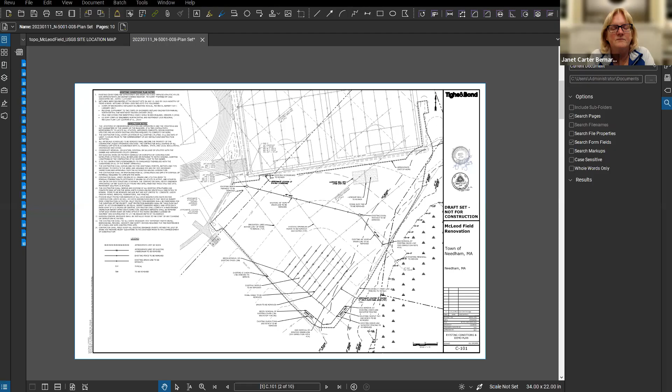Existing field, you all know where we're at. The parking lot sits over here, these are the two synthetic fields, you can see the corner of the track up here. But here's McLeod, which is what we're talking about, and more importantly, here's your jurisdictional wetland down here. You can see the buffers that we've laid out as well.

The existing infield sits where you see these under-drains here. As Ed had pointed out, up in this location there's an existing drain line that comes all the way around the DeFazio synthetic fields, but then cuts across the outfield of the existing baseball field and discharges through a headwall to the wetland system. Pay attention to how close your existing baseball field is - you can see the backstop is tucked right in down close to your wetlands here.

So if I kind of look to see what we're trying to do here, we've pulled the entire field away from the wetland system. Being that we're going to a 60-foot diamond versus a 90-foot diamond, that allowed us, with a little bit smaller field, to pull away and create more of a buffer between the field itself and the wetland.

You can see that we're proposing fencing, so this will be a fenced-in system for the whole entire field, which you don't have for the baseball field now, so this will be a nice upgrade. The backstop, where it was way down here, we've pulled it way up here, so the backstop is almost entirely out of your buffers.

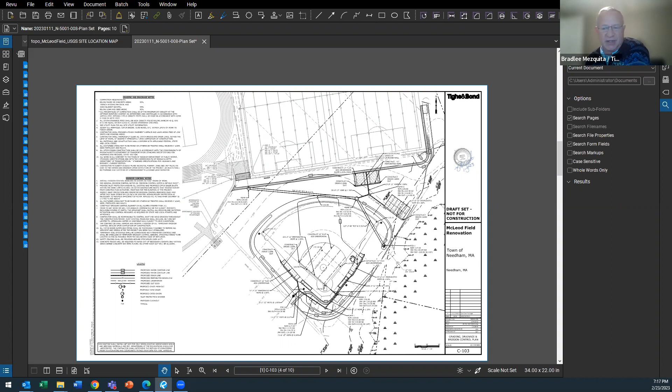Some of the things that were interesting as I go to a grading plan - you can see this whole drain line is the one that Ed's been having trouble with over the years, with breaks in the pipe, having settlement and creating sinkholes out there in the middle of the field. We're proposing, since we're going to be doing all this work for the field anyway, to go back and replace that line. You will see, if I can zoom in here.

As we get down close to the end, here's your head wall. We are dropping a new manhole over the existing line. That way we don't have to touch the existing pipe that's within your buffer. So we are picking it up there and we'll replace everything new as we get farther away.

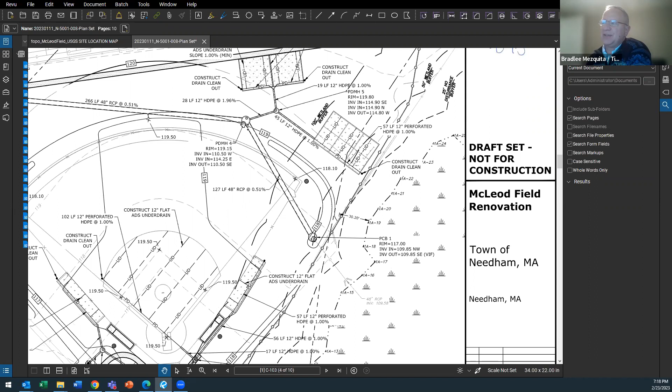Other things, you can see all these under drain lines. The infield mix would be underlain with a perforated under drain system that provides better playability of the field during heavy rain events. We can actually drain it and hopefully get you out there quicker. The synthetic turf has an under drain system that would tie back to the drainage system, not unlike what you already have out here. You can see on the plan, all the under drain you already have underneath your synthetics is very similar.

Other than that, we are pitching the ball field. One thing we saw with your existing field that we wanted to change is currently everything slopes from the synthetic fields and just sheet drains all the way towards the wetland. Obviously not great for your wetland, but also not great for the infield either, because we're pushing all that water right towards the infield. So we're going to regrade as we do this, basically creating a high point out here in center field.

Pitching it towards either foul line and kind of shooting it around with swales over, around the baseball field. So hopefully that'll give us a little bit drier surface, a little bit better drainage and playability for the kids out there, and provide hopefully a state-of-the-art, top-notch field for the town.

That's kind of the work that's being done. I don't know how much you want me to get into details of this. I mean, it's construction type details. You care, or do you want to stop there? Well, maybe we'll ask some questions, but if you could leave that up, that would be helpful.

I'll have commission members first. I'll just go through them. Dave, you have any questions at this stage?

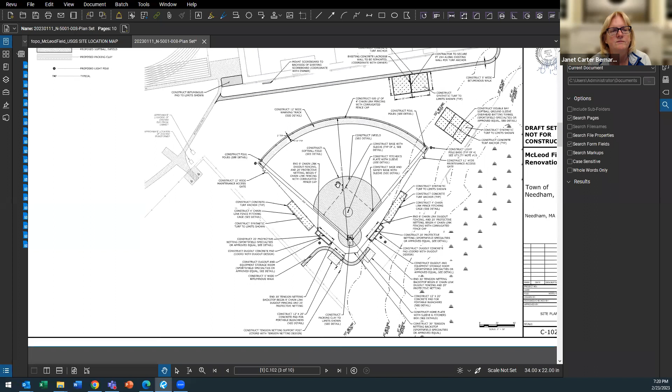Yeah, I got a couple questions relating to drainage. A couple things may not be necessarily relevant to the wetlands issue, but that's okay.

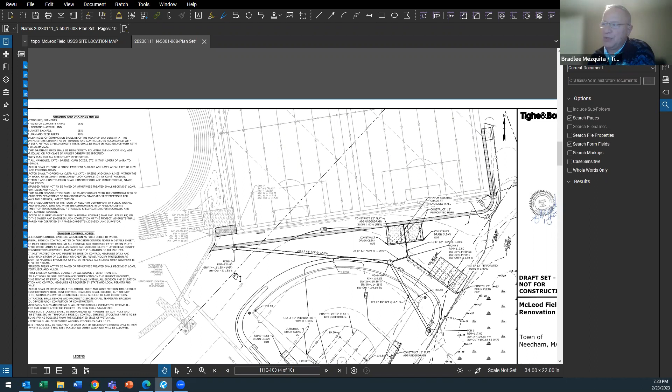I'm just curious, like the 48-inch drain, that's a pretty big drain. It is. Did you think about making it smaller? It's existing. I know, but you're taking it out, so- And all we're doing is replacing the pipe, same pipe, same diameter. This pipe actually goes all the way up the side and collects all the runoff from these fields, and then goes up, I believe, even underneath the railroad tracks and connects that neighborhood up there. So that's a significant watershed. We did not propose to reduce the size of that at all.

Yeah, I'm sure it wasn't in your scope to. It wasn't, but certainly it would take a full drainage analysis of the town to figure out what's going to that. Yeah, I was just curious because I walked out there the other day and looked at it. I was surprised to see it was so big. Yeah, but I agree with you, it's a big pipe.

Okay, so the second question I have is in the lower right-hand side, there's an outfall. It looks like you're keeping a piece of an existing drain. That's existing from your existing field that's out there today. Okay, so that's going to be the main drain from the field, is that correct? The under drains. Okay, and my third question is, this field is going to be clay, right?

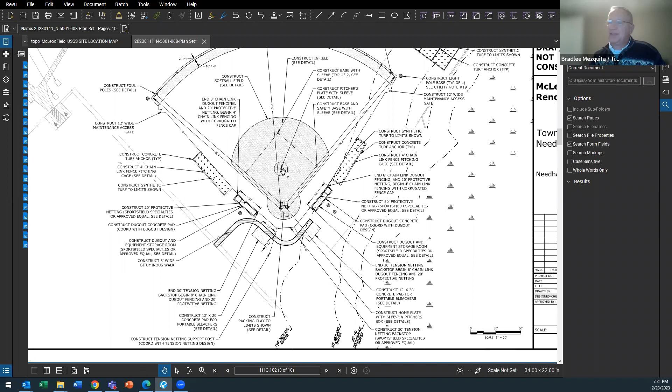Clay, maybe some sand, and it's going to be compacted. It'd be a normal clay / infield mix for the area here. So isn't that impervious? What's the purpose of the drain, and how is that going to drain? You mentioned some swales and whatever, so I'm trying to figure out - there's your infield mix in the shaded area here. Yeah, and then it'll be grass in the outfield.

But as I go back to the grading plan, what they want to do, you're correct. A lot of the infield mix, when you put that mix on, it becomes a poorly drained surface. Yeah, it's clay, right? Yeah, it's a clay mix but it doesn't drain great. But what you want to do is pull any water from the ground below it, pull it away the best you can, to give it the best chance you got of getting water off.

No different than if you're watching the Red Sox on a summer evening - if they get a big downpour, they go out there and put tarps on it because they have the same issue with their clay. It doesn't absorb the water, it doesn't take the water real well, so it's going to sheet off. That's why we have everything basically pitching off the field as well.

So it's gonna sheet off and go into some catch basins? Right. You can see up here, we started a swale, we have a swale that comes down. We pick it up in a little yard drain right there, which comes to this system, which comes to that outlet you had talked about previously.

Okay, well, I think your plans and presentation were pretty good, so I appreciate that. Thank you. Great, thanks Dave.

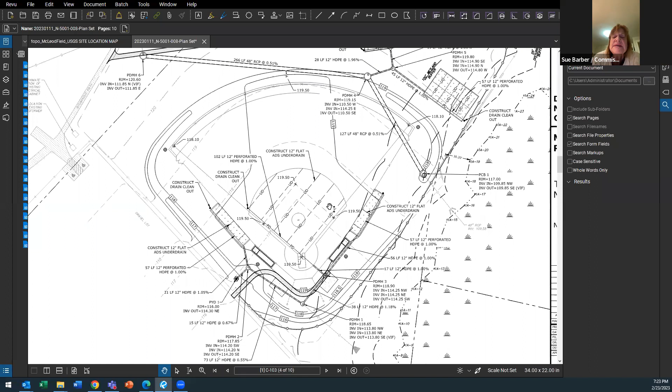Sue, do you have any questions or comments? I just have a couple of questions. One is, what would be the difference of drainage into the wetlands, pre and post?

Your existing field - we're essentially putting a field to a field, so we're splitting hairs here. But the existing baseball field has a bigger infield, so if we're looking at the infield mix as impervious, so to speak, your existing baseball field has a larger area. That being said, we are putting a little concrete pad here, just to hold the little bleachers, so that's a bit of addition. And we have this new sidewalk. So they're pretty close - I wouldn't say they're right on, but we're going from grass to grass and from field to field, so it's not a big change.

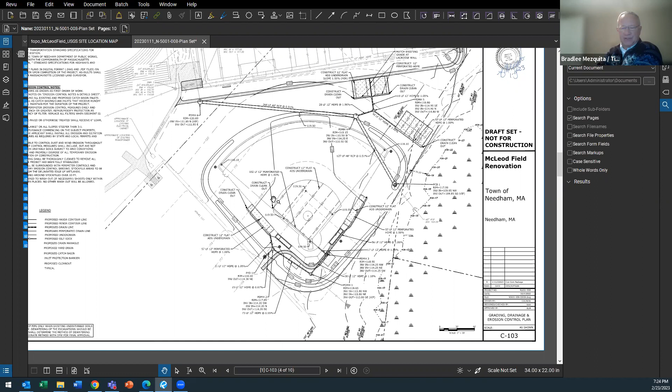My second question is, I know the baseball field was bigger and you're pulling it back to a softball field. Within what buffer zone is the baseball field now, and work within that zone to pull it back?

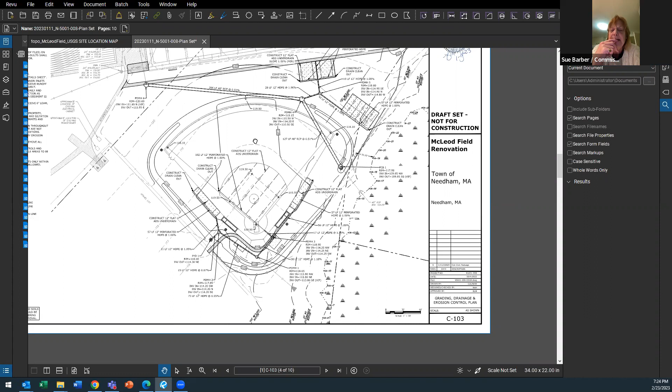Okay, let's see if I can do this here. So here's your existing field. There's your 100-foot setback right here. Here's your 50-foot. Your backstop is here, so your backstop's within your 100, and as you come down the right field line, you're kind of in the 50 right down on this side here. Okay, there's your buffers.

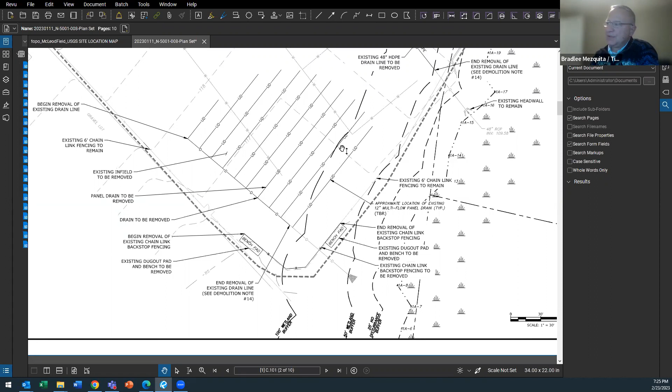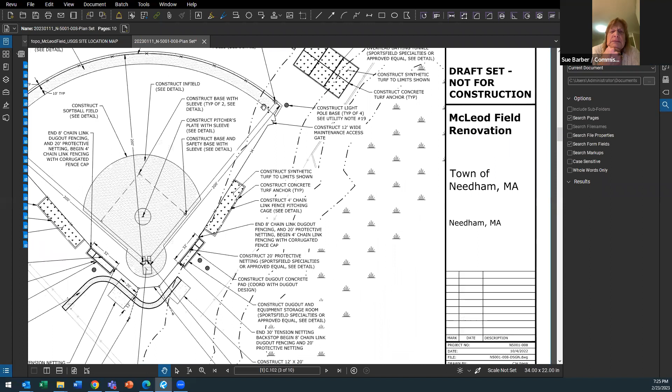Now, if I go to the proposed plan, we're totally out of your 50. And here's your 100, so you got this little concrete here. And then you have this little corner of the field up here, and then these two synthetic - batting tunnel and pitching tunnel.

So work would be done in no less than the 50-foot with the renovation between the baseball field turning it into a softball field. Well, let me just look at the grading. So we're talking the same thing.

We're gonna have a temporary impact to get in this drain line, because that gets within your 50. We stay right at the limit of the 50, right here, to put in that manhole we talked about. And then we have a little bit of grading back here just to get it reseeded and shaped, but then it goes back to grass.

Thank you, it's a great plan. We need it. Can we ask a quick question?

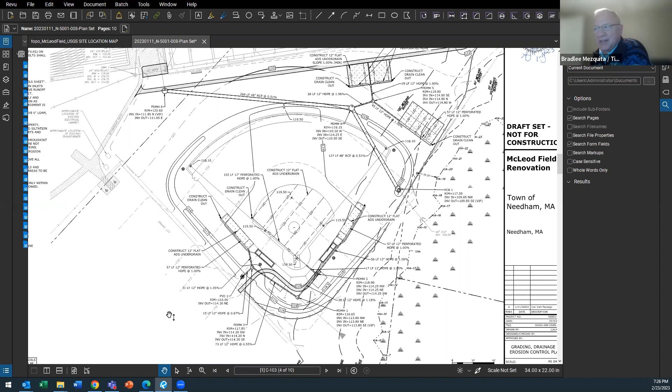A lot of input with softball dads and people of the town. We've had 3 or 4 different meetings down there with them to try and come up with ideas, their wishes, what we would like to add, what do they like about other towns, and trying to create something that they can all be proud of, to have their women's softball down here.

Deb, you had a question? Just so if your limit of work is at the 50, but you have the erosion controls at 25. The limit of work is not at the 50 - they have a lot more, like that synthetic field is in the 50 to 25.

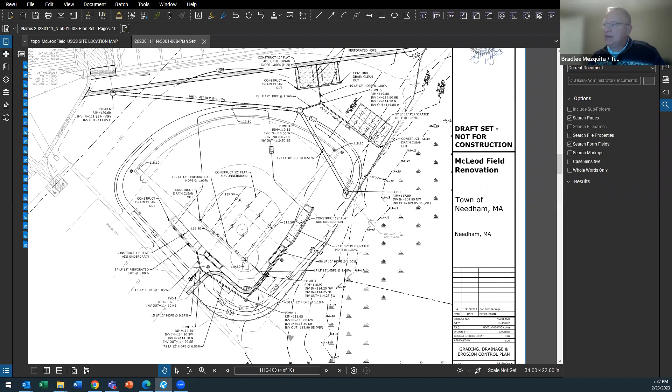Right here it is, yeah. Oh okay, thank you. See this line right here, the one with little circles on it - that's our silt sock. And basically, if you've been out there and walked this perimeter on this side, there's an existing fence line, and then as you come up here, there's a little existing retaining wall. You can actually see it here, which is the fence line is right on top of it. So we're staying inside the existing fence line.

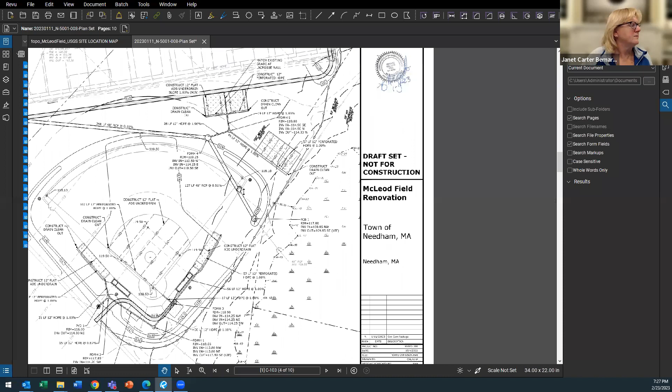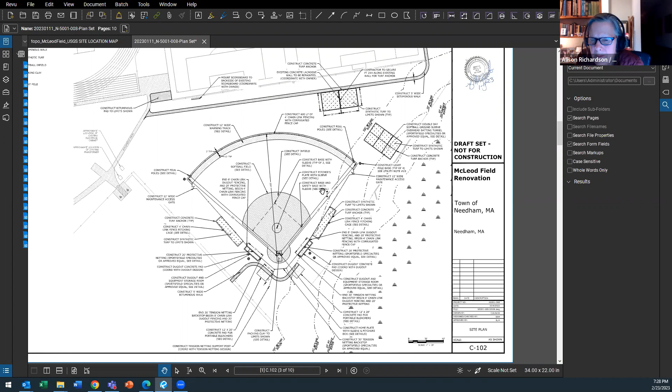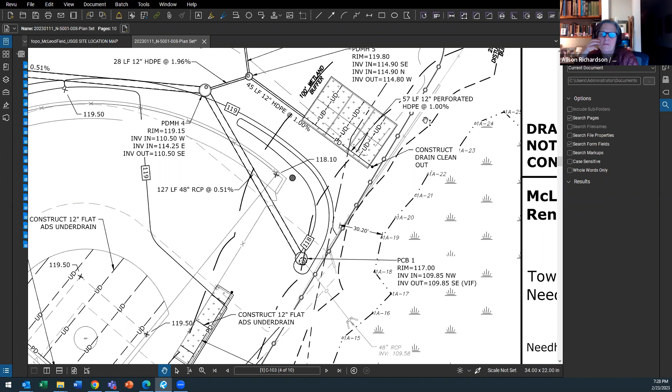Just had a question about whether you're planning to use any de-icing material on the sidewalk you're constructing. It's outside the conservation jurisdiction, but the drainage from that sidewalk is going to lead into the wetlands, so I was wondering if you planned to use some sort of de-icing material.

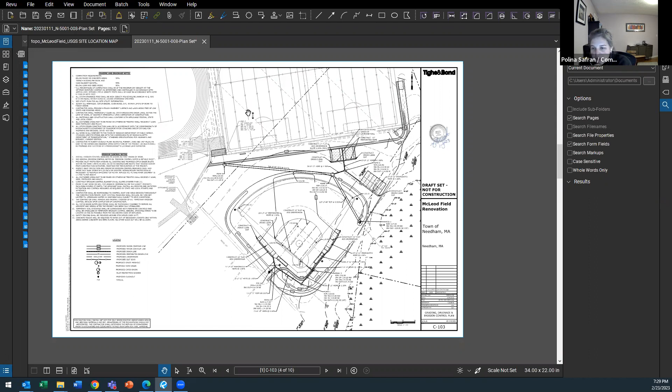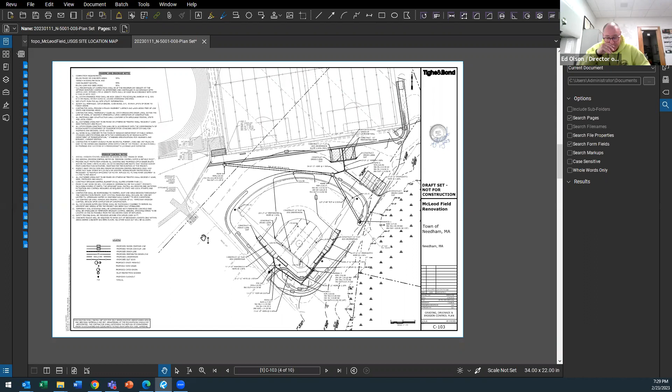I can speak to that, or let Ed speak to it, but the baseball field wouldn't be used in the winter, so I wouldn't expect any need to even clear snow off the sidewalk. I don't see a need for that. Ed, can you share what your practice is? We don't shovel, plow, or de-ice any walkways in town. As Brad mentioned, the field will be closed in the wintertime, but I understand the point - no, we would not be using de-icers there.

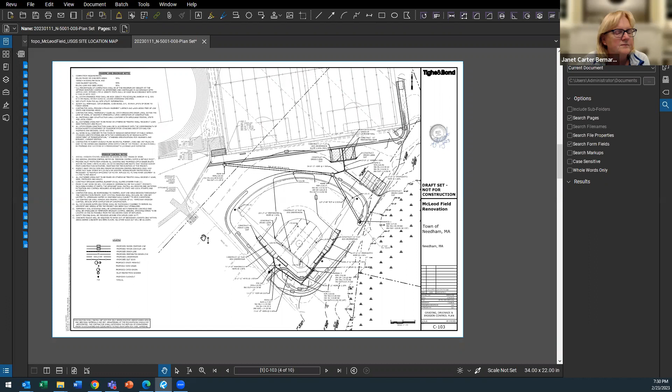So tell us about the lights and how they're not going to bother habitat. Let me zoom in for you - as I mentioned, those are your poles here. Ed, correct me if I'm wrong, we just looked at that the other day - I think there were 60 or 70 foot tall poles, a little bit shorter than the ones on the synthetics out there today, but still fairly tall. The light fixtures we're proposing are LED fixtures, and they'd only be used on game nights or practice nights, obviously, so it's not on a timer to come on every night - not an everyday sort of thing.

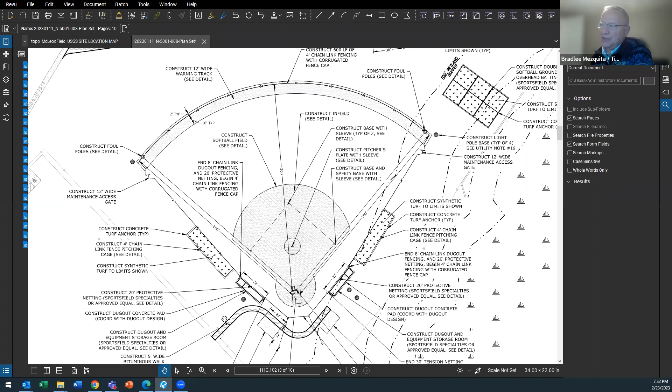In addition, when we work with Musco Lighting, who is your light system provider around town for the athletic fields, they provide a photometric plan for us. On each pole there are several fixtures, and they aim them based on the dimensions and location shown on our plan. They work with us to aim each individual head so we're only lighting the field surface - it goes as far as people in the bleachers not even getting lighting. These are advanced cutoff fixtures, unlike a street light that just sheds light down. These are directed more like a spotlight, aimed at a certain location to ensure coverage all over the field, but outside that fence line, it's going to be dark.

And what about above the lights - are they also dark sky lights? Yeah, everything's dark sky compliant. Yes, dark sky compliant, that's the word. Yep.

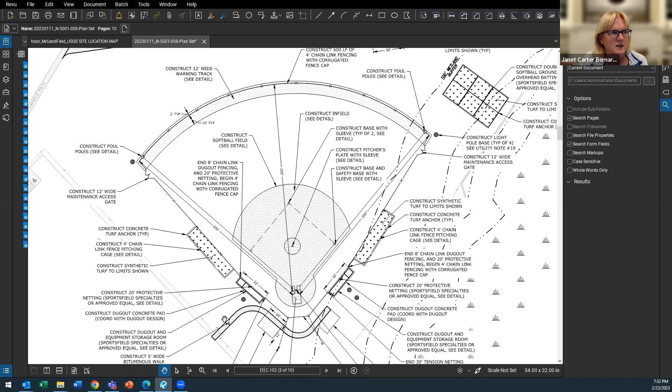Okay, so there's the two outlets, but those two outlets are existing and you're just retying into them. So you're on the drainage. Yeah, I'm jumping in. You're exactly right, so here's your 48-inch here, and then you have this little outlet down here as well. They're both existing.

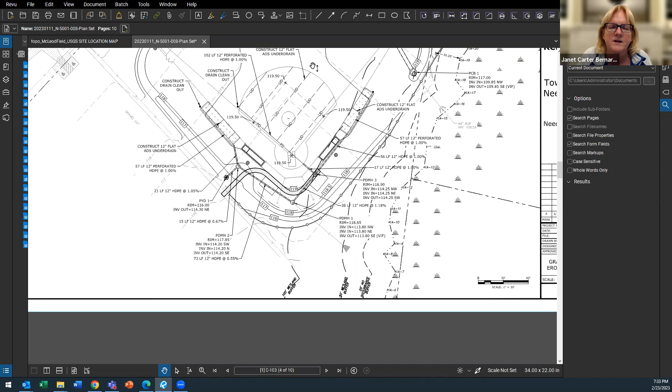And can you point out again where this existing fence is that you're not going beyond? Sure, I'm gonna go back to existing conditions. Here we go, so here's your backstop. You can see the X's, that's our fence delineation. You can see where it keeps coming up right here. That stays. That's not, that whole fence is staying that whole way? Correct. And so here's your retaining wall.

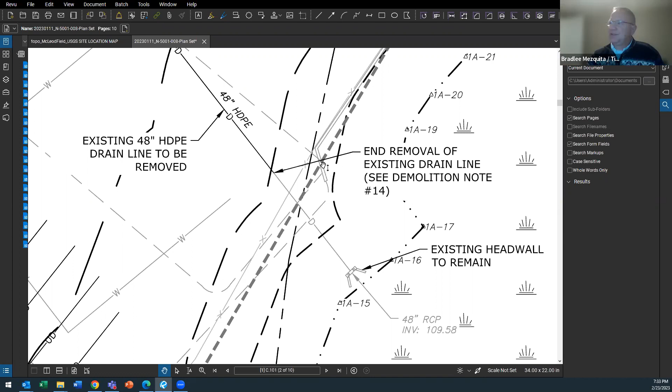So now if I zoom out and go back to our plan, you see the fence is way over here. Okay, so that's staying, up to the fence between the dugouts and the fence, what's proposed there? Just lawn, correct.

And what's on the other side of the fence between the fence and the wetland? There's a slope, it basically slopes from that fence line down into the wetlands. It's scrub shrub type material, it doesn't get cut, it doesn't get touched. We are not going outside of that fence. We aren't going on the other side of the fence. Great.

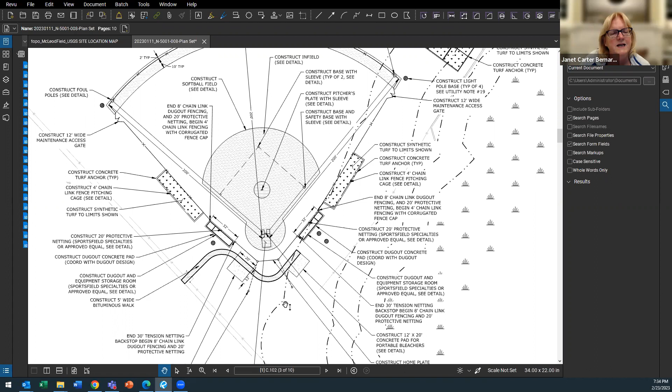And the synthetic surface areas, you use that because it gets harder use or something? Yeah, most of those areas are very concentrated, they're always in the same spot. It's a pitching mound, a batting box, catcher's box, always in the same spot. If you try to do grass in those areas, Ed and his people will be pulling their hair out, it'll end up just being mud. They just can't keep grass on those areas because they get worn down.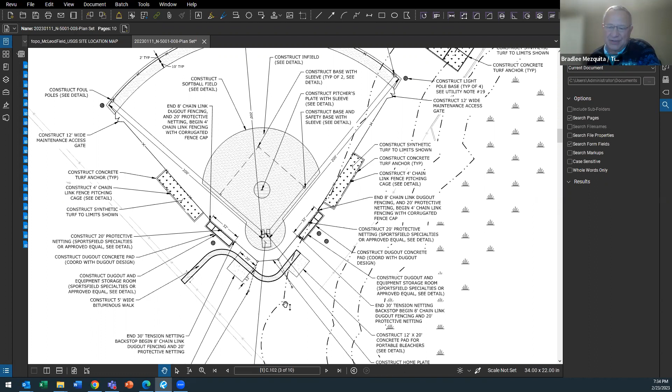And to the west of the field, is that the parking lot? This is the parking lot right here. That's the parking lot. Okay, so my last question, and then I'll ask the commission again if they have any more.

The 48-inch pipe, when you are removing that and replacing it, what happens to all of the water coming out of it during construction? Well, the goal, and we had several discussions on this because we understand you have high groundwater out there, the goal is to do this in hopefully August. Obviously from an environmental standpoint, but in all honesty, from a construction standpoint it's easier, so that would be the issue.

What if we do have some groundwater whenever they get to digging this thing? They're gonna have to put that through some kind of a silt sack or collect any sediment that they're pulling out from that water.

The 48-inch pipe, is it flowing all the time right now into the wetlands? No, it doesn't flow all the time. I'm watching Ed shake his head. It's a stormwater collection system. Okay, so it only really flows when it's raining. Correct, because there's no weep holes along the way with groundwater getting into it. There's no one dumping their sump pump, if there's not any leaks in your pipe, they shouldn't.

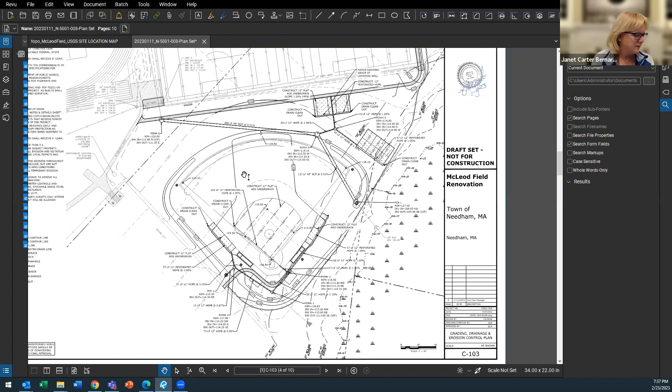Anybody else? Peter, Paulina, Jeff, okay. Anybody in the audience have any questions? There are no raised hands.

I think the only thing I heard that we are still looking for is that number that shows the difference between impervious and pervious. Depending on how the rest of the board feels, if we want to close this, that number will come along before we complete our order of conditions, so we can plug that in.

Is that an okay thing to do, Deb? You can check it, you can tell me I can't do that. No, that's fine with me.

Do you want some kind of dewatering plan or anything? That's a good idea because it could be a mess. We'll certainly have one in our specs. We actually met with DPW to review that.

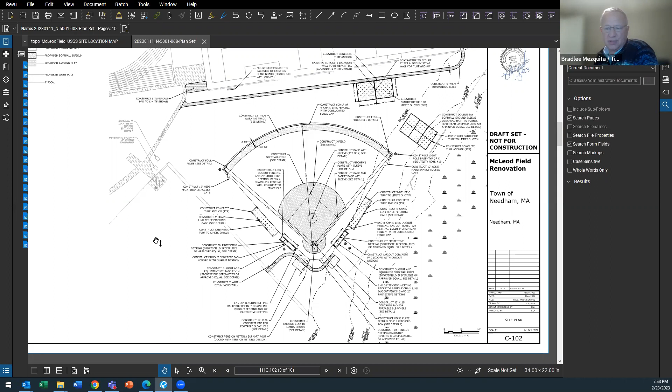I don't know if you want us to pull out a spec for you, or would you rather just have DPW QC our construction documents to make sure we're dealing with groundwater?

I'd like to understand how you're dealing with groundwater when you store stormwater, or when you're digging holes, and that it's not just being pumped toward the wetlands.

We can specify that. The actual means and methods we'll probably let the contractor choose which method he wants, but we can give direction on what they can and can't do as part of that.

So if a SWPPP is required, we would like to see a copy of that 14 days before you start construction, and a dewatering plan prior to that, so there should be a pre-construction meeting our staff can attend, and we can be handed the dewatering plan at that time. Does that work for you?

That worked perfect, because then the contractor would be right there with us, and input can come from the contractor so that they are aware of the sensitivity to the area. That's a good idea, to make sure. I can just condition it. Yeah, that can be a condition.

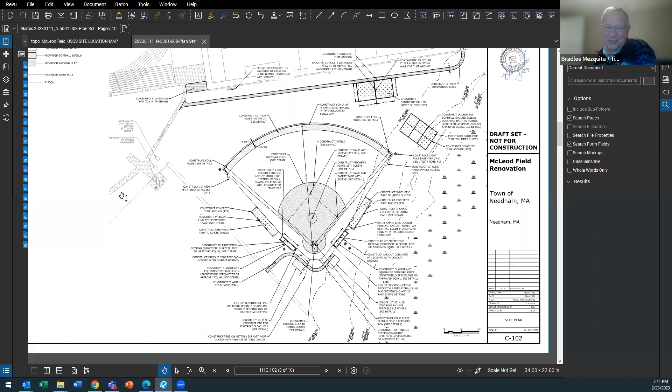Then it's not impervious. Okay, I'm thinking impervious is like concrete and the benches, walks—the concrete, the walkways. Gotcha, okay, things that are—actually, I don't know, packed gravel.

I mean, your dugout area is going to be smaller, I assume, anyway. Yeah, dugout areas, you've got the two bleacher pads and then the walkways, but yes, we got it. Thank you.

Anything else from anybody? Are we ready to close this? Does anybody have an objection if we add the impervious area afterwards?

I think they're pretty close, just by looking at it. I would just like to include it in our findings as a number so that we're able to make that statement.

And they are being pulled further away. We will not have any work within the 25-foot buffer. There will be no mowing or anything beyond that fence line anyway, which is already occurring. They're pulling further away from the wetlands and using two existing outfalls, treating the discharge before it's released.

I guess the discharge isn't actually being treated any better from the 48-inch pipe. With something that gigantic, you're not going to be able to treat it in any sensible way.

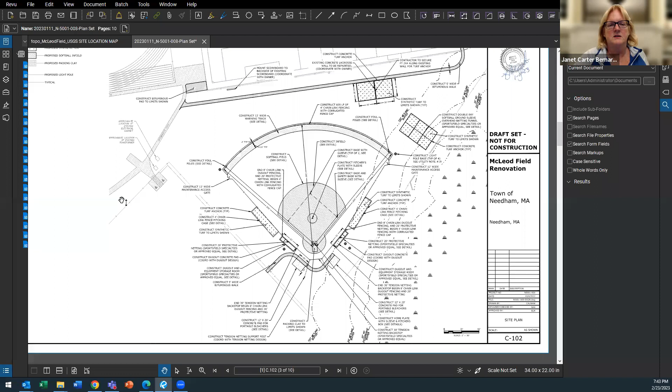Okay, is anybody ready to close the hearing? I'll take a motion. You can pull this down if you'd like to.

I motion to issue an order of conditions and close the hearing. Second. Great, and just to review, we're just closing the hearing now, not issuing the order yet. We'll review the order of conditions and make that motion afterward.

That was seconded. All in favor? Allison, aye. Peter, aye. Paulina, aye. Sue, aye. Dave, aye. Janet, aye. Great, I think we did it.

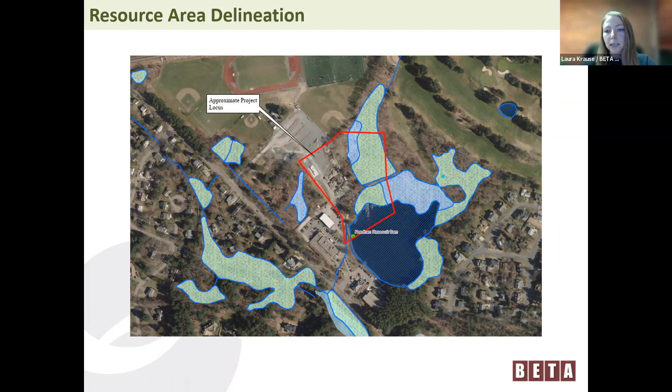In terms of floodplain, no portion of the reservoir is actually within the 100-year floodplain as mapped by FEMA. We recently completed our wildlife habitat evaluation, and the goal was to look within our limits of work, but also within the reservoir as a whole, to see if we're going to be impacting some emergent vegetation. When we impact the vegetation in the dredging area, we wanted to make sure we weren't eliminating that feature throughout the entire reservoir, and we won't be, because there are those habitat features throughout the reservoir.

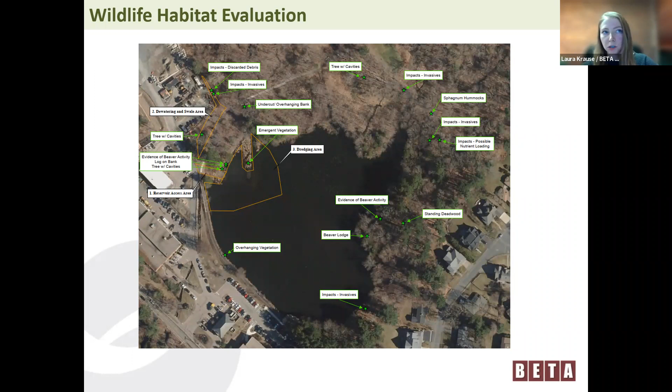Talk a little bit about the sampling results. There were no reportable concentrations of any contaminants, but we did have low levels of polyaromatic hydrocarbons, low levels of metals, VOCs. One sample did contain some PCBs, and there were pesticides and herbicides in two of the sediment samples as well.

To give you background, we have to do the sampling for the 401 water quality cert process, because we have to know how to manage the sediment when we are working with it and moving it out of the reservoir, and also where we can bring it once that process is complete. We don't want to have a pile of sediment without a place for it to go, so we have to line that up beforehand.

So are you saying no concentrations were above a reportable level? None above reportable limits. So there are no MCP concerns here in terms of Massachusetts Contingency Plan, but there were detected levels - they were just below, actually very far below, the reportable conditions.

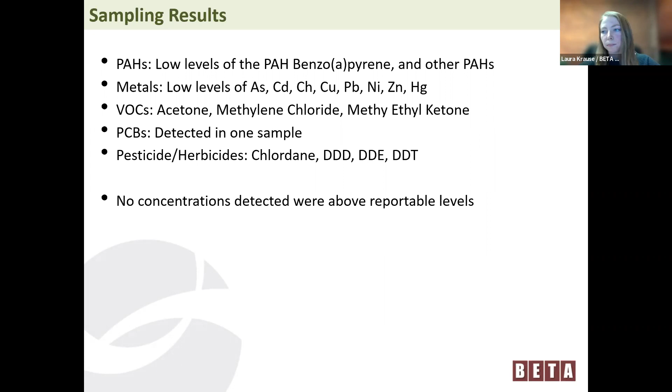So, project elements: we're going to have a substantial dewatering plan for this project in order to construct and conduct the dredging. We'll install a turbidity curtain, and then we'll have cofferdams. The whole area will be dewatered. Large equipment will make its way into the reservoir. Material will be excavated, brought to an area to decant so we can remove all the water from the sediment, and then it will be taken off-site based on the sampling and what available locations we identify during the 401 process.

We'll also be regrading the swales, restoring those sections of the walking path that I discussed. And there is a plan to install an informational kiosk somewhere on the site. I don't know if we've identified exactly where, but I know that's a request of the commission, or at least of the Natural Resources Department.

So an informational kiosk - what was requested, and Deb maybe you can speak to this a bit more. I think it's so there can be postings about wildlife and things like that at the reservoir park area, not necessarily about the project. We have kiosks in different areas, and I thought since this gets so much foot traffic, we should have a kiosk where we can put presentations we're going to be having, just various information. So we're looking for a good spot, and we added it into this project.

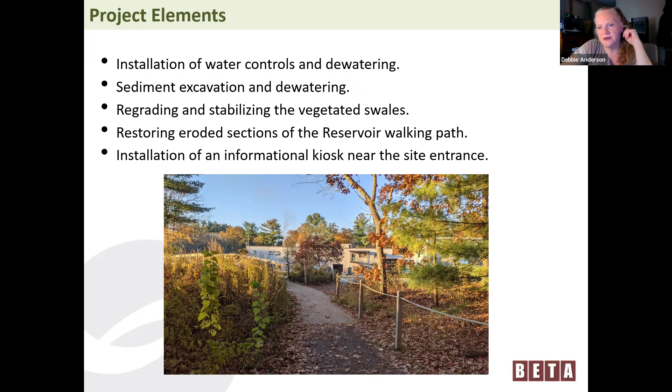Excellent, thank you. Yeah, okay.

So this plan is a little busy, but this is the dredge operations plan. I'll walk you through it. This right here is the wetland. This is the boardwalk that crosses Alder Brook. This is the driveway that comes up to the staging area. The plan is to shut down this portion of the driveway, and that'll be the staging area for equipment, and the way sediment will make its way from the dredging operation through the wetland up to the dewatering area. This will be the sediment dewatering area. We also have our dewatering area for the basin, because we'll be pumping water from the reservoir to a frac tank, which will discharge through a dirt bag into this area surrounded by erosion controls, and then it will infiltrate and make its way back to the wetland, but it will be clean at that point.

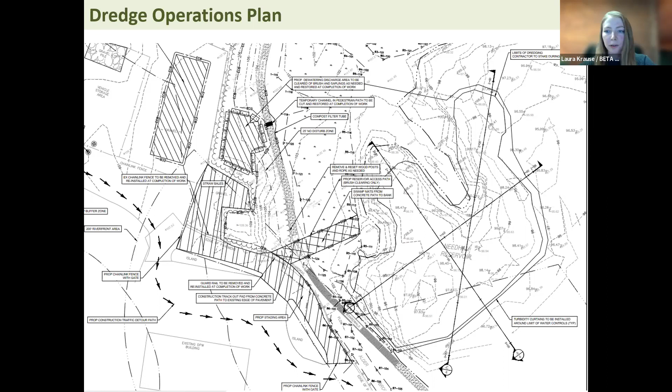How long is this process supposed to take? That's a good question we can answer in the Notice of Intent. I'm not 100% sure, but I believe it's a few months, 2 to 3 months.

Here is our plan for the swale.

This area will have two swales, one along the back side, the north side of the DPW yard, and one along the east side. This is a view of that east side of the DPW staging area. There are significant invasive species which we plan to manage as part of the reconstruction of the swales.

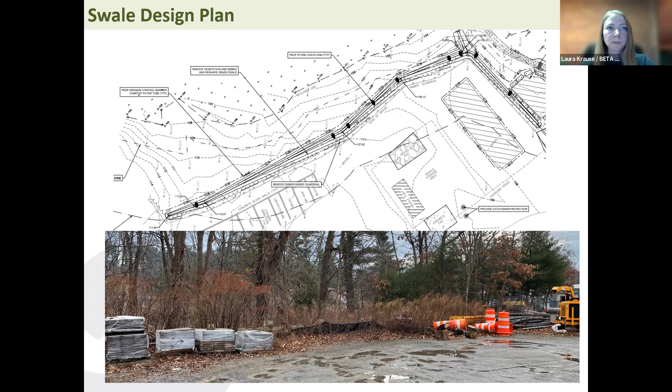In terms of impacts, this is going to have a large temporary impact on the reservoir—around 30,000 square feet of work within the reservoir itself. We also have about 1,600 square feet of bordering vegetated wetland impact associated with access, because we have to get into the area.

These blue areas are located between the delineated bank and the boundary of the mean low flow or mean low water. So it's not technically land underwater, but we felt we needed to quantify it. We quantified that as part of the ENF, and we'll restore those areas. It's a really low gradient bank essentially, so we didn't want to just quantify it in linear feet—we also wanted to quantify it in square feet. And then we have some riverfront area impacts associated with the staging.

So why is the purple not like the 101 contour that's in the middle? Is that a high point? Is that in the white—this area right here? Yeah, why? Okay, so this area is basically between the mean low water elevation and the bank boundary.

We're not going to be altering that—that's the finger of cattail. If you've been out to the reservoir, there's a little finger of cattail that the blue heron likes to hang out at, so we didn't want to eliminate that habitat feature. We decided to leave that as part of the design.

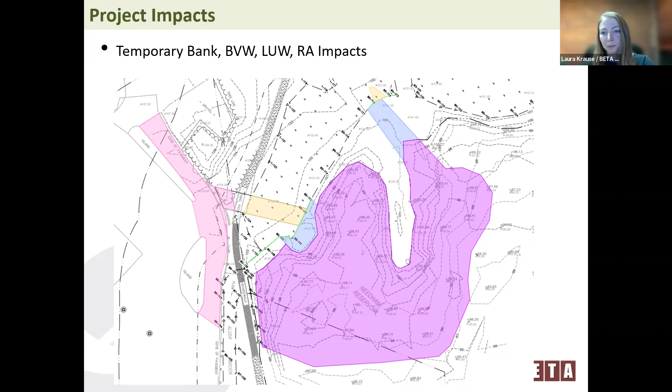Just some impact mitigation features we've already designed into the project. We are planning to conduct the work during the low flow season, July through October or November, in order to prevent impacts to hibernating wildlife during winter. It will also help decrease the amount of dewatering we need to do, since we'll be working during low flow conditions.

We'll have oversight during construction, especially during dewatering when we're lowering the water level within the cofferdam. We'll have oversight from our wildlife biologist, who'll be on site relocating any species when they're identified as they lower the water level. The work will be conducted behind cofferdams to decrease turbidity increases in the waterway.

All impact areas are temporary and will be restored. We have planting plans for the bank and for the wetlands that will be temporarily altered, as well as the buffer zone. We're proposing to use swamp mats to access the dredging area—placing large timber mats in the wetlands to minimize compaction of the soils. We'll also install the turbidity curtains.

This happened at Rosemary Lake when they did that dredging operation—they placed some temporary fill. In this case, we'll require that they put a geotextile below any temporary fill so it can be easily taken out, with a delineated limit of where that material was installed. We'll also be conducting invasive species management as part of the project.

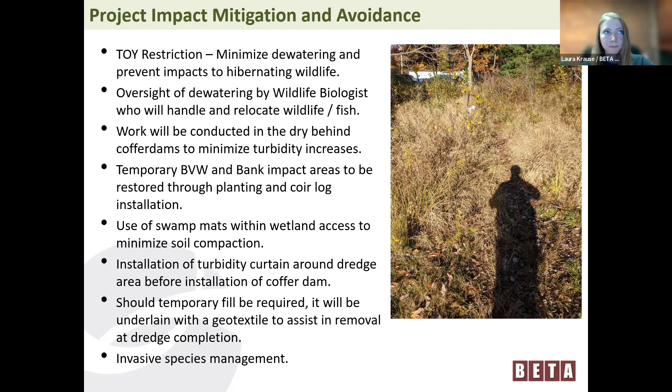This is a picture of our site restoration plan. We do have restoration plantings within the temporary wetland impact area, and this is the buffer zone dewatering area, which we'll replant as well after the dewatering is complete.

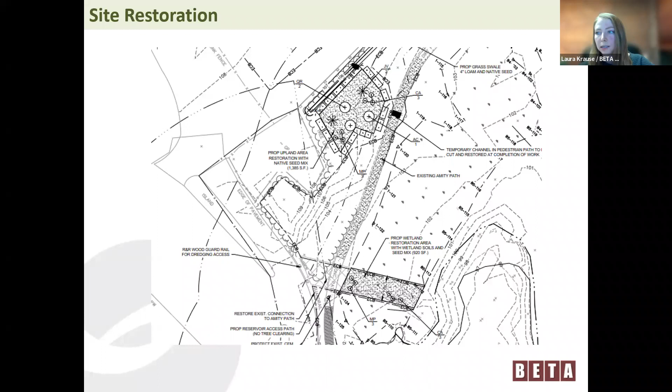For next steps, we plan to submit in March, likely for the March 30th filing deadline. We'll have our ENF certificate by March 27th—that's the next step there. It should be noticed in the Monitor tomorrow, and there may be a public meeting, as there usually is one associated with the ENF filing.

Typically it's virtual, so that's something that will be coming in the next couple of weeks. The anticipated hearing would be on April 13th, so it sounds like we'll be in person for that. We'll be submitting our 401 water quality certification application in May, our PCN with the Army Corps in August, and then bidding is anticipated in spring of 2024, with construction and low flow in summer 2024.

Is that the end? That is the end. So I will stop sharing unless we want to go back to any plans. Maybe leave it for the moment. I'll go through the commission and see if anybody has any questions, because this is basically just an informal discussion. We haven't actually filed yet, but if anybody wants to have input on what that filing might look like, this is a good opportunity.

Allison, anything? Yeah, just a couple of things. Based on the Rosemary Lake dredging project, which isn't really apples to apples because that was a much bigger project with phosphorus and everything, there was quite a significant monitoring program—I know they didn't follow it perfectly, but I remember Deb was involved with that. I was wondering if there's going to be something like that on this, maybe better.